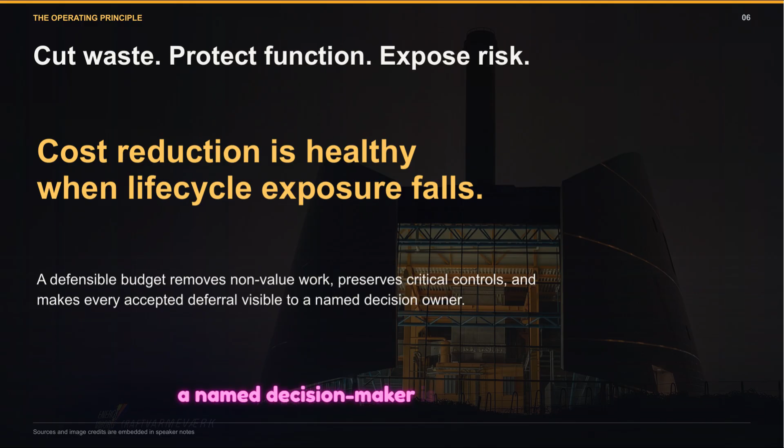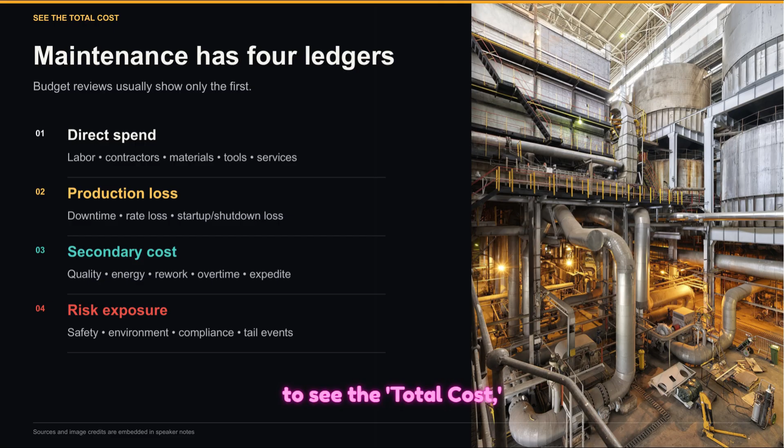To manage costs effectively, we must look at the four ledgers of maintenance. Most budget reviews only focus on the first one, direct spend on labor and materials. However, to see the total cost, we must include production losses, secondary costs like energy and quality, and the broader risk exposure to safety and compliance. Ignoring the other three ledgers is like looking at an iceberg and only considering the tip.

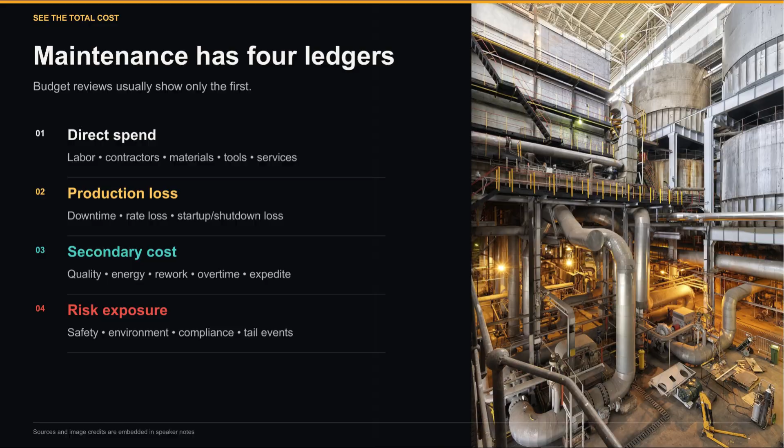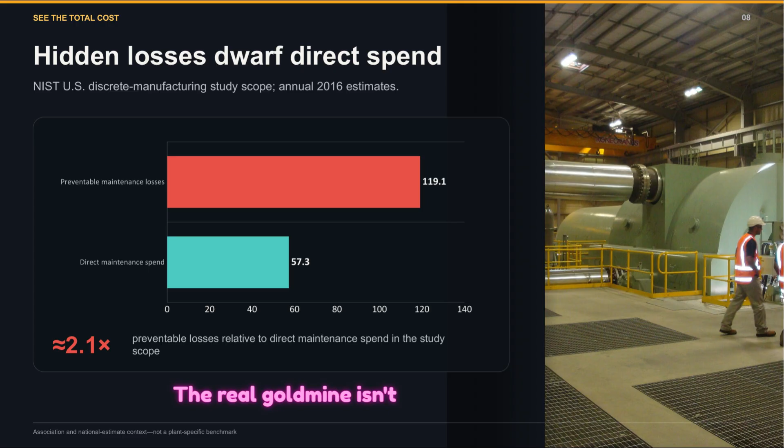Data supports this perspective. A NIST study on U.S. discrete manufacturing found that preventable maintenance losses were more than double the direct maintenance spend. This means that for every dollar we spend on maintenance, there are $2 of potential savings hidden in the losses caused by poor reliability. The real gold mine isn't in cutting the budget, it's in eliminating the preventable losses.

To find those savings, we need to distinguish between productive and wasteful spending. Productive spending is an investment that changes the condition, probability, or consequence of a failure. Wasteful spending consumes resources without changing a business outcome. When evaluating a task, ask yourself, what specific function are we protecting, and what decision would change if we didn't do this work?

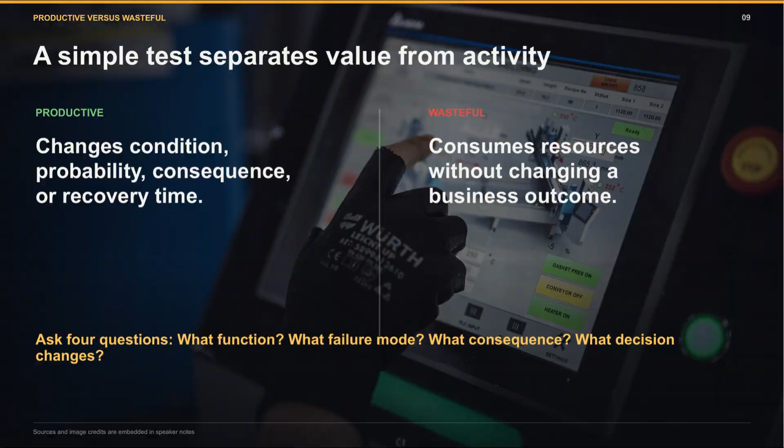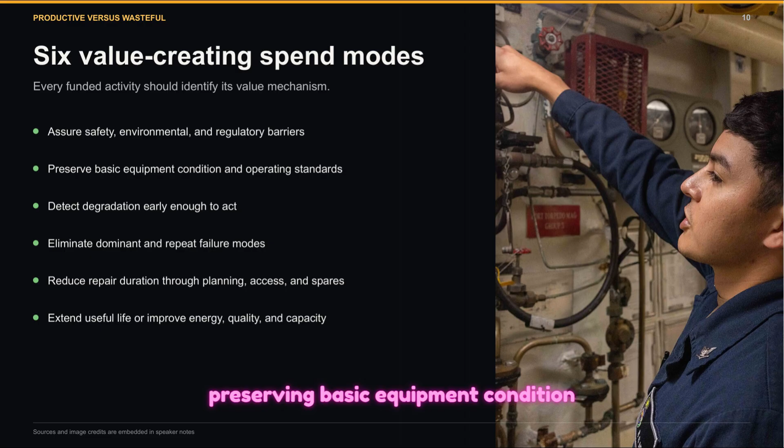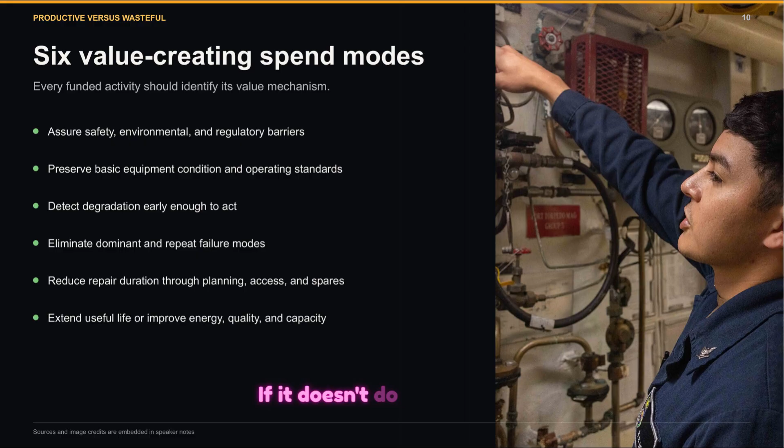There are 6 primary ways maintenance creates value. Every activity you fund should fit into one of these: assuring safety barriers, preserving basic equipment condition, detecting degradation early, eliminating repeat failures, reducing repair time through better planning, or extending the useful life of an asset. If it doesn't do one of these, it's a candidate for a cut.

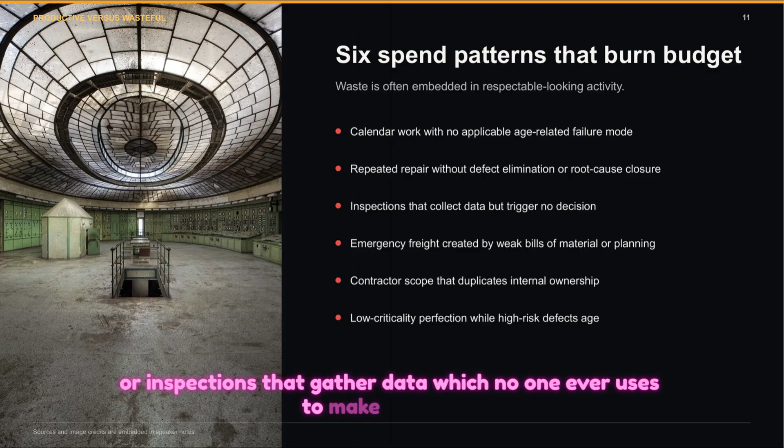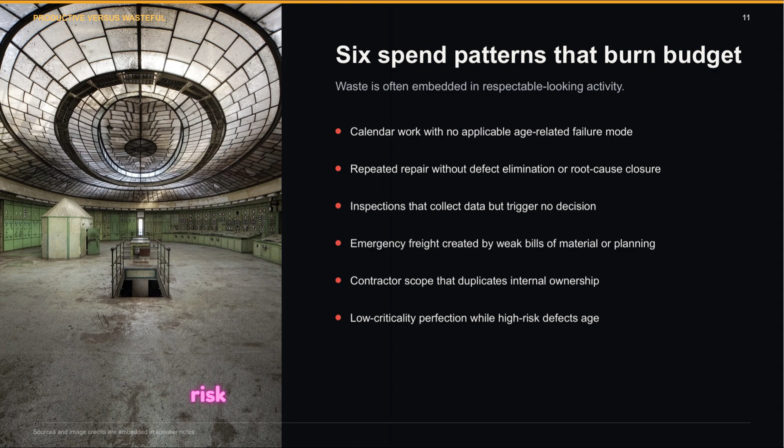Conversely, waste often hides in plain sight. We see it in calendar-based work that doesn't match how equipment actually fails, or inspections that gather data which no one ever uses to make a decision. We also see waste in emergency freight costs caused by poor planning or in spending high-value resources on low-criticality assets, while high-risk defects are left to age in the backlog.

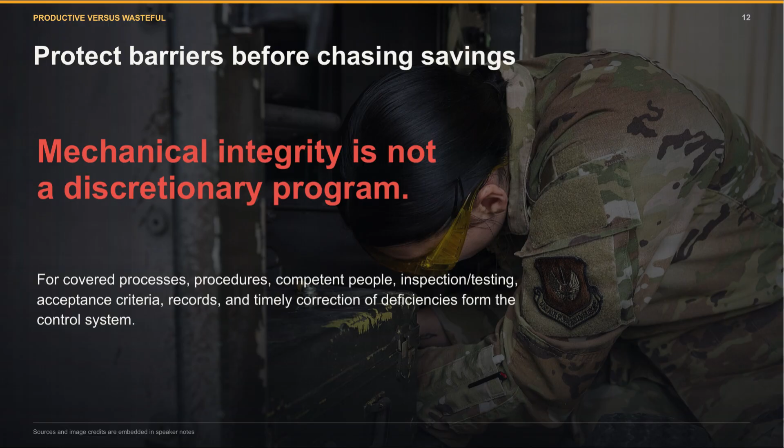Before we start chasing savings, we must protect our barriers. Mechanical integrity is not a discretionary program. For covered processes, our procedures, inspections, and timely corrections are the control system that prevents catastrophic events. These are non-negotiable items that must be funded to maintain our license to operate. Criticality is the compass that tells us where our dollars should go.

It's based on three factors: consequence, what happens if it breaks; likelihood, how likely is it to break soon; and recoverability, how quickly can we fix it. By understanding these, we ensure our budget is focused on the risks that truly matter to the business.

Once we know the criticality, we must match the task to the failure mode. For example, if a failure is random, time-based replacement is a waste. We should use condition-based monitoring instead. If a failure is caused by human error, we don't need more maintenance. We need better procedures or training. Matching the how to the why is the key to efficiency.

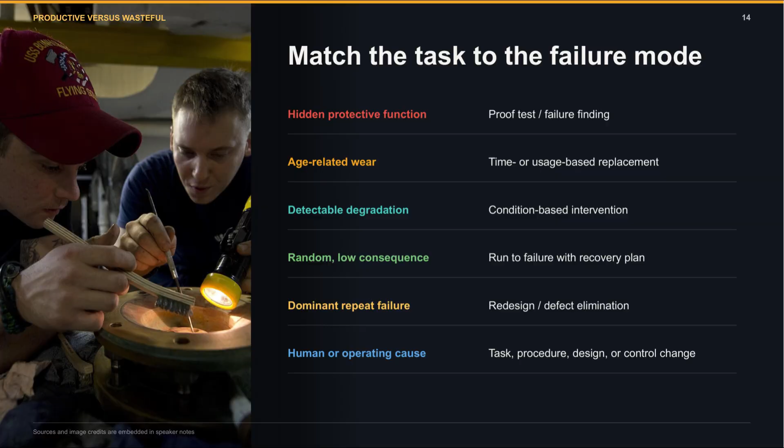It's a hard truth, but more maintenance does not always equal more reliability. Preventive maintenance, PM, can actually be a form of waste if it doesn't target a credible failure mode or if the interval is arbitrary. We should challenge any task that is more intrusive than the risk it is trying to remove.

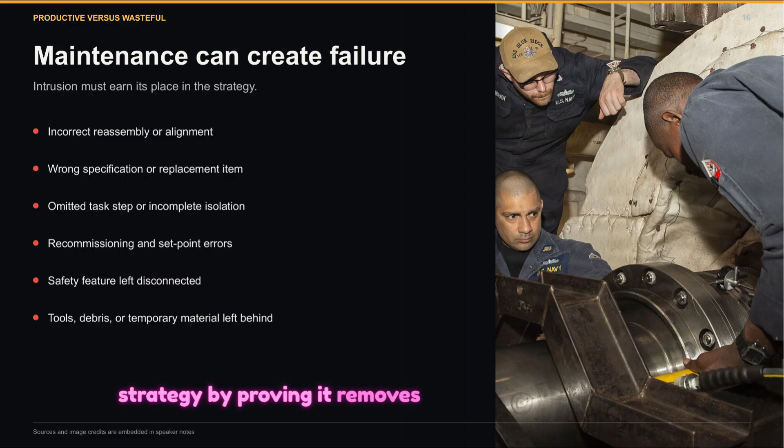In fact, maintenance can sometimes create failure. This infant mortality or maintenance-induced failure occurs through incorrect reassembly, wrong parts, or even leaving tools behind. Every time we open a machine, we introduce risk. Therefore, every intrusive task must earn its place in our strategy by proving it removes more risk than it creates.

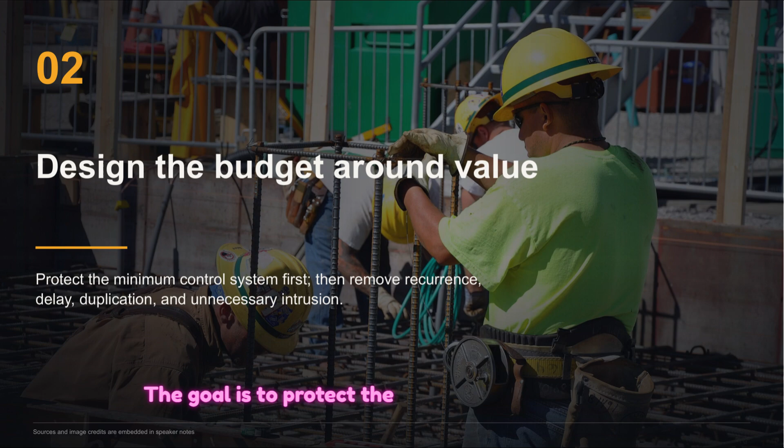In our second section, we'll look at how to design the budget around value. The goal is to protect the minimum control system first, then systematically remove the sources of recurrence, delay, and unnecessary intrusion. A mature budget architecture consists of 5 protected pools. Instead of one big bucket of money, we separate spending into integrity assurance, basic condition like lubrication, risk-selected work, defect elimination, and enablement like planning and skills. This structure makes it clear exactly what we are buying with our maintenance dollars.

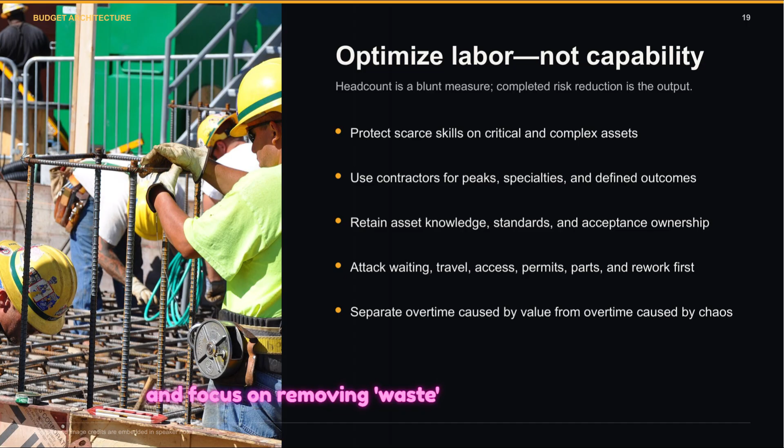When it comes to labor, we should optimize for capability rather than just headcount. The goal is completed risk reduction. We should protect our internal experts for critical assets, use contractors for peak loads, and focus on removing waste in the workday, like waiting for permits or searching for parts, rather than just cutting people.

Spares are another critical area. They protect continuity, but they carry a cost. We shouldn't just look at inventory turns. We need to classify spares by the consequence of not having them. A $10 bearing that stops a $10,000 per hour line is a critical spare, regardless of how often it turns.

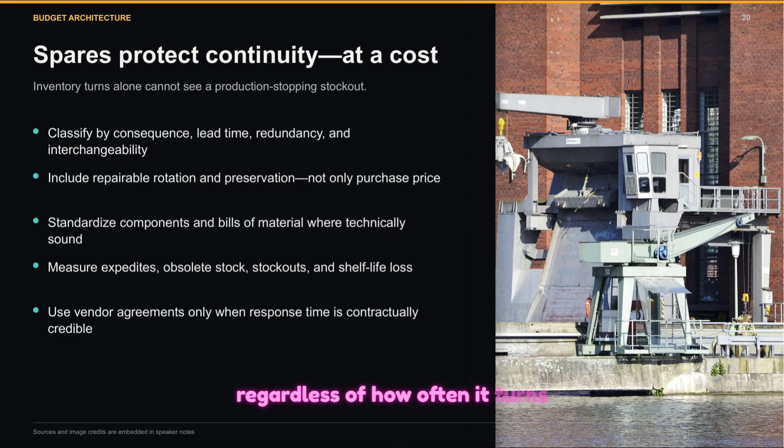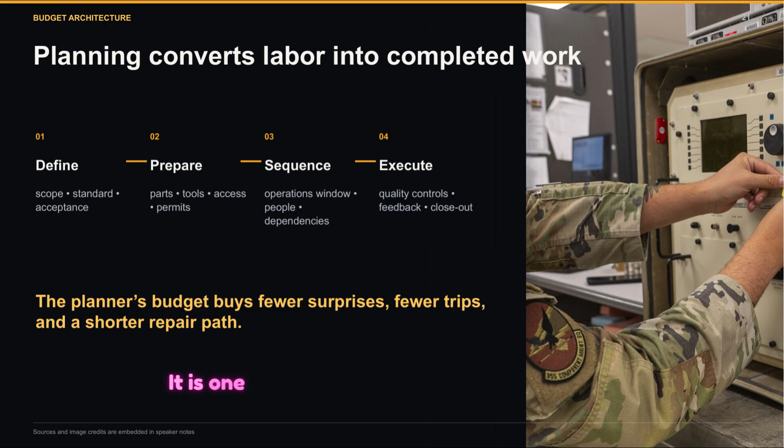Work planning is the engine that converts labor into value. A planner's budget is an investment in fewer surprises. By defining scope, preparing parts, and sequencing operations, planning ensures that when a technician goes to the field, the job is done quickly and correctly the first time. It is one of the most effective ways to reduce maintenance costs.

For major outages, savings require readiness. The biggest waste in outages is cutting the scope after the contractors have already arrived on site. Real savings come from a rigorous freeze process, deciding what is in and what is out months in advance based on a technical risk review.

In the digital age, we must remember that we aren't buying sensors, we are buying decisions. A digital investment is only worth it if the alert arrives with enough lead time for a named owner to take an action that is cheaper than the failure. Without a clear action path, expensive telemetry is just more data waste.

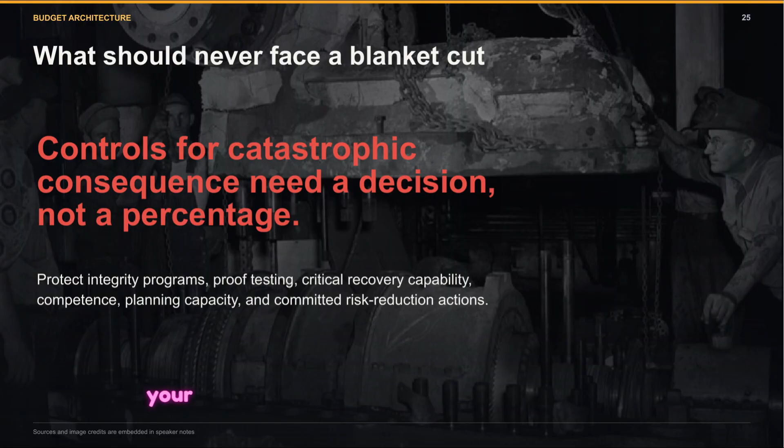Conversely, there are things that should never face a blanket percentage cut. Controls for catastrophic consequences need a conscious decision, not a math-based reduction. Protecting your integrity programs and your planning capacity is essential to ensuring that your cost-cutting doesn't lead to a future disaster.

Section 3 addresses a critical concept: deferred maintenance. It's important to see deferred maintenance for what it really is: borrowed risk. If we decide not to do a task, we are essentially taking a loan that must be paid back later, often with high interest in the form of increased failure probability.

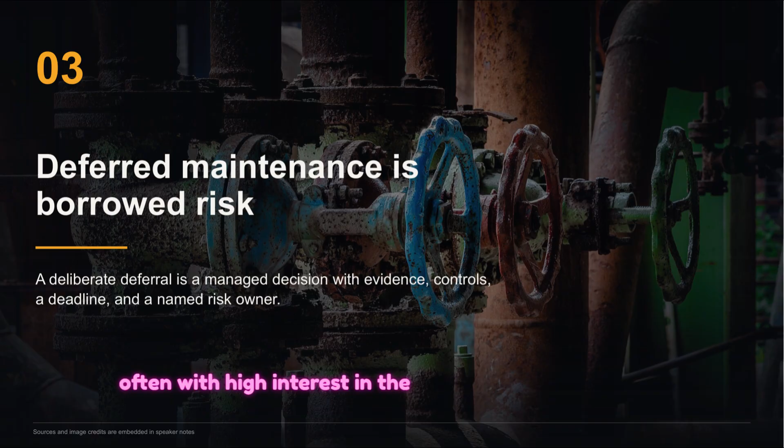Not all backlog is the same. We must distinguish between work that isn't due yet, work that is ready to be scheduled, work that is simply overdue, and work that we have deferred by a deliberate decision. True deferred maintenance is an intentional postponement of necessary work, and it needs to be managed as a risk.

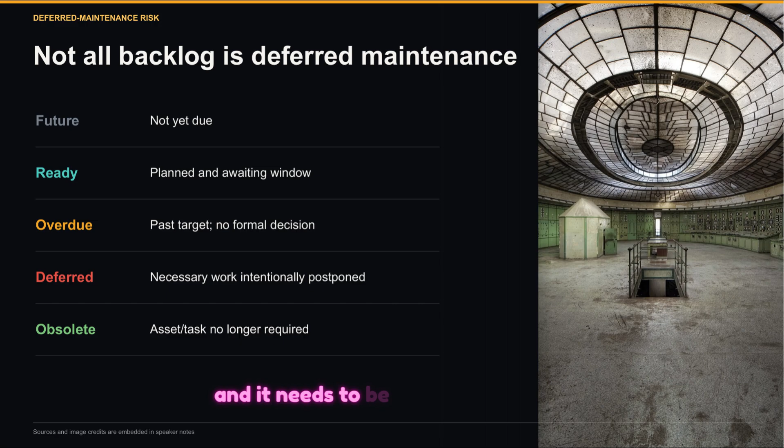We should treat our backlog like a risk register. Instead of just looking at the oldest work orders, prioritize tasks by their consequence and the time left to intervene. Anything in the red zone needs an owner, a target date for completion, and a formal path for funding. This keeps the risk visible to the leadership team.

A key tool here is the PF window. Condition monitoring gives us information, but that information only has value if it gives us time to act. If we detect a potential failure, P, but wait until it's too close to functional failure, F, to intervene, we've lost our window of opportunity and our ability to save money.

When you decide to defer, you have 5 logical choices. You can accept the risk if the consequence is low, monitor it more closely, time box it for the next outage, escalate for immediate funding if the risk is too high, or prohibit operation if a critical safety barrier is at risk. A deferral is only valid if it's one of these active decisions.

To make these decisions clear for management, put a dollar range on the exposure. Calculate the expected loss by multiplying the likelihood of failure by the total consequence. Use a range, low, most likely, and high, to reflect uncertainty. This moves the conversation from technical jargon to business risk.

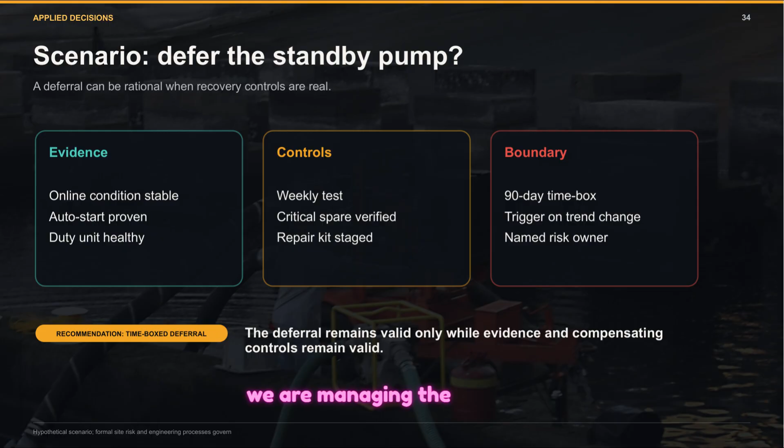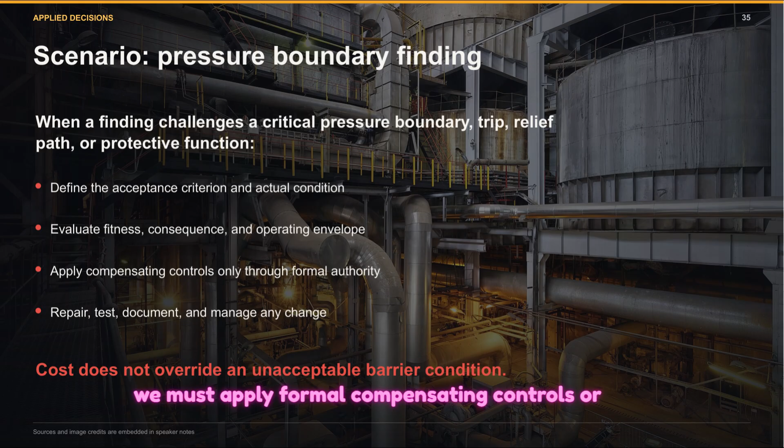However, some scenarios are non-negotiable. If a finding involves a pressure boundary or a safety relief path, cost does not override the safety requirement. In these cases, we must apply formal compensating controls or shut down until the barrier is restored. Integrity is the foundation of our business.

In our final section, we discuss lifecycle cost as the ultimate decision frame. A great business case doesn't just look at the maintenance budget for this month. It compares complete cash flows and risks over the entire life of the asset. The purchase price is just the first cash flow.

To see the true picture, we must add operation and maintenance costs, energy consumption, downtime risk, and eventual disposal costs. By discounting these back to a present value, we can compare different options on an even playing field. Often, a cheaper asset is actually more expensive in the long run.

To get management approval, you need a structured case. It should cover the evidence of change, the specific failure mode, the financial and safety consequences, the options available, the economics, including sensitivity, and a clear recommendation with an owner and a deadline.

Your communication should be concise. A single page should make the decision clear to an executive. State the why now, the exposure in dollars, and the options. By showing that you have interim controls in place while waiting for an outage, you build the trust needed to get your budget approved.